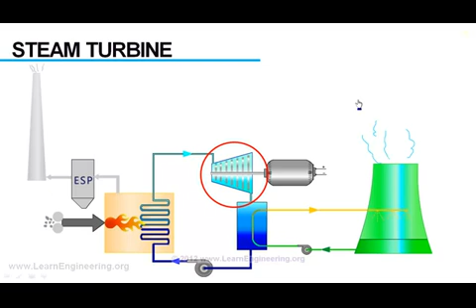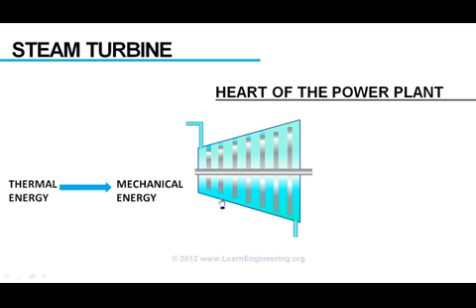In today's video, we will understand the working principle behind a steam turbine. Steam turbines are considered the heart of the power plant, because this is the device which converts thermal energy from fluid to mechanical energy, more precisely as rotational energy of these rotors. So a series of such rotors, which absorb the fluid energy by virtue of its rotation, are the most vital component of a steam turbine.

Let's have a close look at one of such rotor sets, in order to understand more about its working. Here it is. This is one rotor set, and you can see there are a series of blades connected to the hub of the rotor. In different orientations it will look like this, or like this.

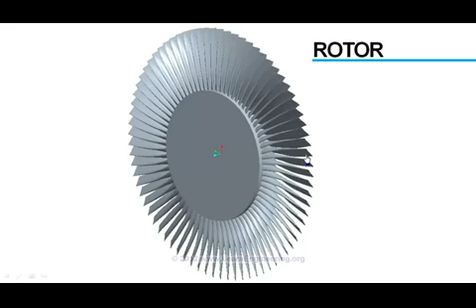If you take a close look at one of such blades, you can observe one thing: this blade is a collection of different airfoil cross-sections set together, which vary in size and shape from bottom to top.

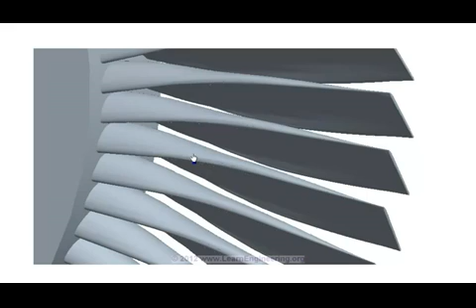When high-energy steam at inlet, with high pressure and temperature, flows over such a blade, it will induce a pressure above and below the blade. Thanks to the special shape of the blade, the pressure above will always be less than the pressure below, so there will be a resultant net force acting in the upward direction. This force will make the blade rotate, in this manner.

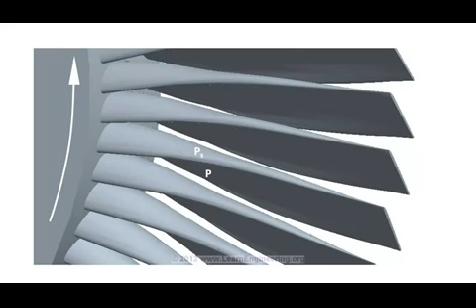As the blade rotates, it absorbs some energy from the fluid, so fluid at exit will have lesser energy compared to inlet. In the coming session we will see how we can predict the energy transfer in fluid, but before moving to that, we will have a brief look at the energy associated with a flowing fluid.

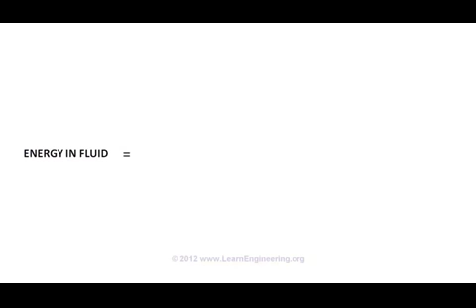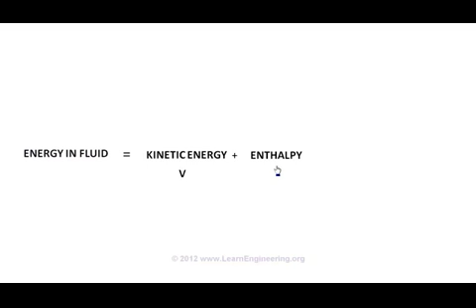There can be three components of energy for a fluid. First, due to its velocity, the kinetic energy part. Second, by virtue of its pressure, the pressure energy. Third component, by virtue of its temperature, the internal energy. The last two components, pressure and internal energy, can be combined and called enthalpy. If a fluid has a high enthalpy value, it means it has high pressure and temperature.

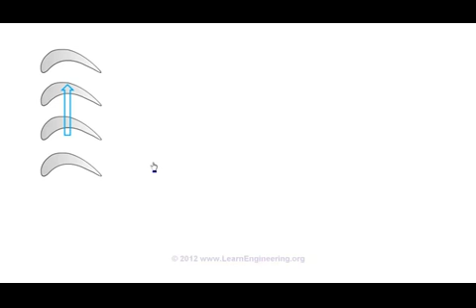Now we will see exactly how a steam turbine absorbs energy from steam. This is the rotor cross-section of a blade at a particular length. As the steam passes over the blade, it will rotate in this direction, and this will result in energy loss to the fluid. For a typical steam turbine, both kinetic energy and enthalpy part come down.

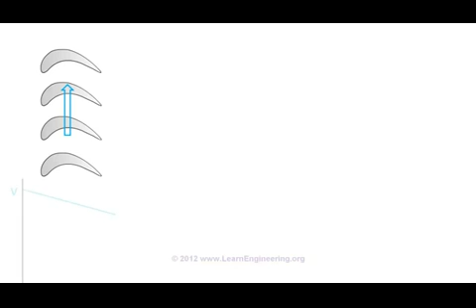So if you plot velocity of steam from inlet to outlet, it will look like this. As kinetic energy decreases, velocity decreases. Similarly, enthalpy also decreases, like this.

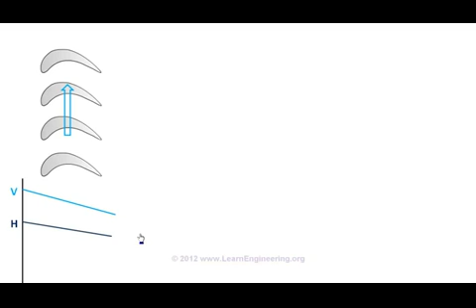Now the next step is to pass this steam to the next stage of rotors. But if you directly pass steam to another set of rotors, it won't absorb much energy, because here the velocity of steam is already very low. So before passing the steam to the next rotor, you should increase the velocity first.

For that, we use something called a nozzle, a stationary device attached to the casing of the turbine. These are also called stators. Stators are also a set of blades, but these blades are stationary. They don't take part in the energy transfer; what they do is simply transform energy from one form to another, or more precisely, transform the enthalpy energy into kinetic energy.

You can see the cross-section area of the nozzle decreases with flow, so due to its special shape the velocity increases, but at the same time enthalpy decreases. If you sum the change in enthalpy and kinetic energy, there won't be any change.

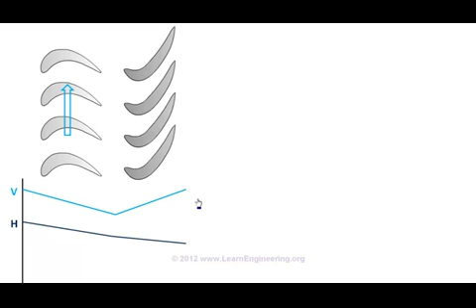Now we have increased the velocity of fluid, so we can put the next set of rotor, then again a stator, and again a rotor. So in a steam turbine there will be alternating sets of such rotors and stators: rotors which move, attached to the hub, and stators which are stationary, attached to the casing of the turbine.

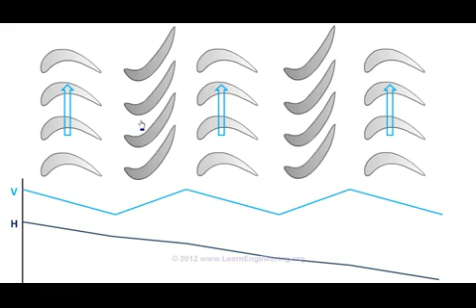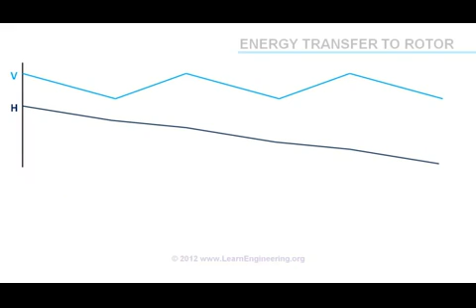Now we will have a close look at the energy transfer at the rotor. If you sum the kinetic energy and enthalpy energy change across the rotor, you will get the total energy transferred.

What could be the contribution of each of these terms? Is it possible that the enthalpy energy change is zero, yet the kinetic energy part contributes to the energy transfer, or vice versa? This is defined in a term called degree of reaction, defined like this. The value of degree of reaction could vary from 0 to 1.

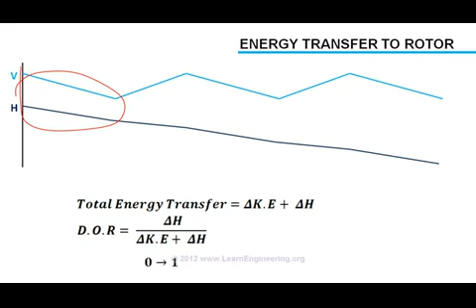Suppose for a turbine the degree of reaction is 0, then such turbines will be known as impulse turbines, or 0% reaction turbines. In such cases, the enthalpy energy change across the rotor will be 0, and energy transfer will be purely due to kinetic energy change.

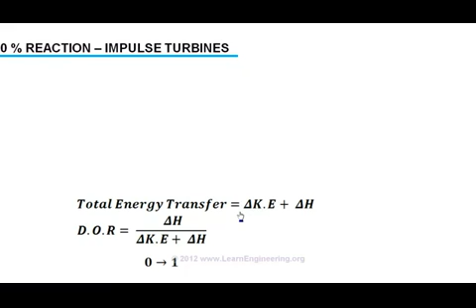Blades of an impulse turbine will look like this. Here fluid actually hits the blade and produces the force, or force is produced on the blades due to the pure impulse action of steam.

We know along the blade enthalpy doesn't change. Along with enthalpy, temperature will also remain the same, because enthalpy is a direct function of temperature, assuming steam as an ideal gas. There will be a slight drop in pressure, but you can almost assume pressure is the same across the rotor. The only quantity which changes here is the velocity.

Now, the other extreme case: the 100% reaction turbines. Here, as you guessed, there won't be any kinetic energy change across the rotor; energy transfer will be purely due to change in enthalpy. This could be a typical blade profile for such a case.

Here fluid passes through the blade without actually hitting it. We know across the blade there is no kinetic energy change, so the absolute value of velocity remains the same across the blade, but pressure, temperature and enthalpy vary across the blade.

A practical steam turbine will be a compromise of these two cases. People usually use a 50% reaction turbine, known as a Parsons turbine.

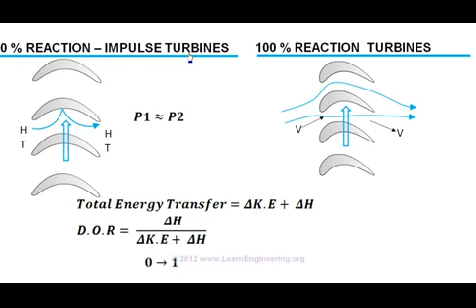That is all about the working of steam turbines. Thank you for watching the video.